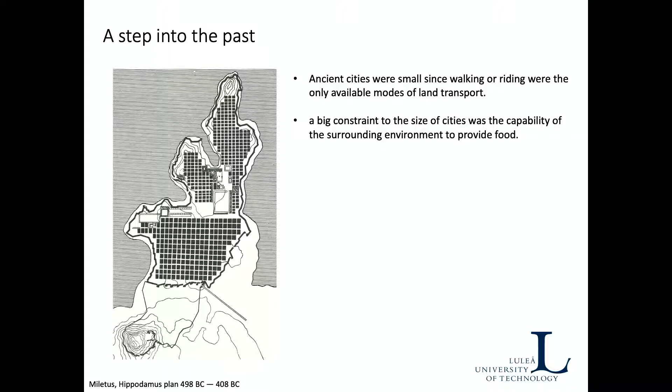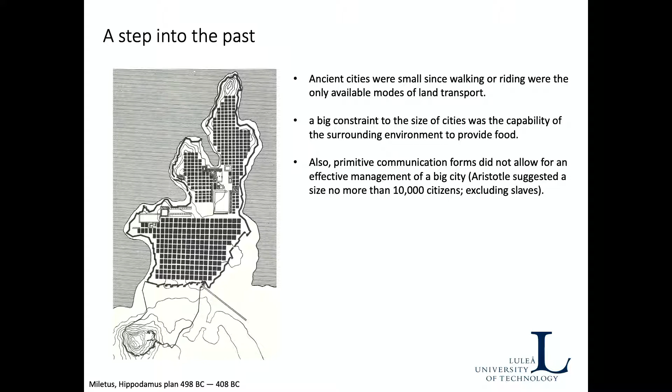But there are also stark differences between cities of the past and today's cities. One such difference is size. Ancient cities were small, since walking or riding were the only forms of transportation available. Also, a big constraint on city size was the capability of the surrounding environment to provide food, and primitive communication did not allow for managing big cities. For example, Aristotle suggested a size of no more than 10,000 citizens was best for managing a city democratically.

Of course, the 10,000 didn't include slaves. Athens at its apex had about 140,000 inhabitants, this time including slaves. A few centuries later, Rome reached 1 million inhabitants during imperial times. At the beginning of the 1900s, there were 11 cities with more than 1 million inhabitants.

According to a United Nations report, in 2018, 23% of the world population was living in cities larger than 1 million inhabitants, while 32% lived in cities smaller than this threshold, and 45% in rural areas. By 2030, the proportion of urban population is set to increase: 26% in larger cities of more than 1 million inhabitants, and 33% in cities smaller than 1 million.

But as we urbanize, the consumption of energy will also increase over time. This is because when people move to urban areas, there is more industrialization, more commuting and transportation, and more consumption. So the urban lifestyle is also an energy-intensive, resource-intensive lifestyle.

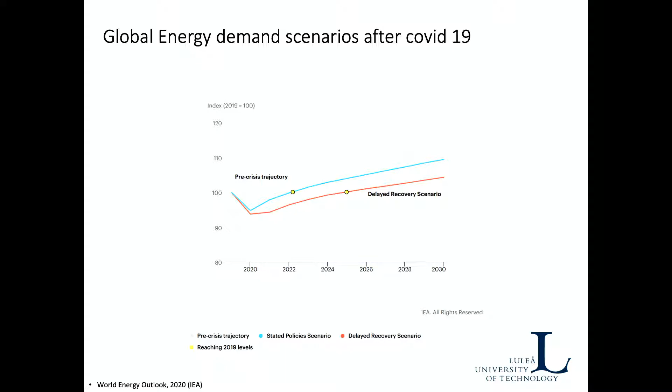You can see in this diagram that even with COVID-19, we've had a setback in the demand for energy. But in the future, we're going to need more and more energy to support our urban lifestyle.

If we look at the forms of primary energy, in the future the lion's share will come more and more from solar photovoltaics and renewables, along with some bridge fuels such as gas.

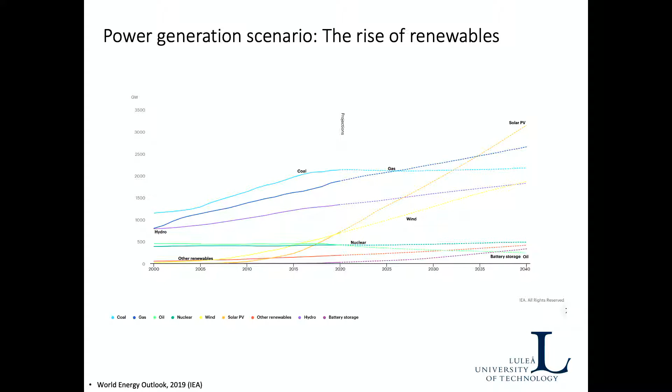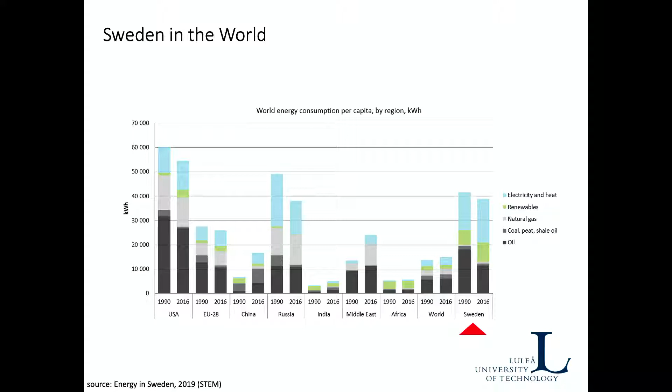If we look at the position of Sweden in the world in terms of energy consumption per capita, we see that Sweden is one of the countries with the largest energy consumption per capita. This is, in many ways, normal—we live in a cold country, so we need to heat our houses, homes, workplaces, and commercial areas. Sweden is also sparsely populated, meaning a lot of energy goes into commuting. But at the same time, Sweden is a very urbanized, advanced, industrialized economy, so energy also goes into manufacturing and consumption.

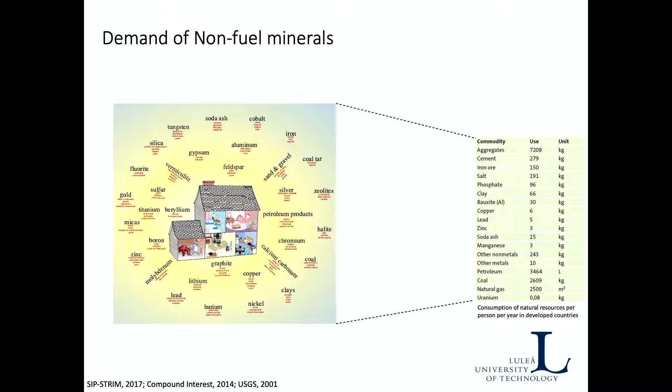We don't need only energy to support our cities, we need also non-fuel minerals. We need materials to build schools, libraries, homes, highways, and also our IT infrastructure, our internet. It has been estimated that around 18 tons of minerals per capita is consumed every year in a developed country around the world.

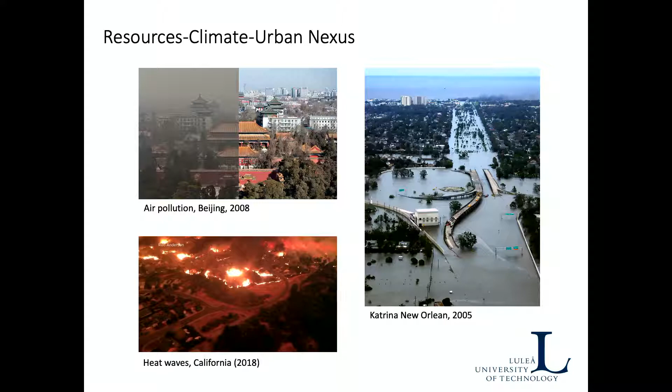From a research perspective, there is a link, or a nexus, between the way we design and build cities, the way we use resources to build these cities and support urban living, and the way consumption of resources affects climate. In turn, climate change affects cities in terms of extreme events. Here are 3 screenshots of possible events that have already happened, for example flooding, air pollution, or heat waves. So I think it is important to keep in mind this triple nexus.

Why would an architect or a planner be talking about that? Again, I think it's good to look at the definition of the subject of architecture and planning. Architecture comes from the Greek word architecton, which means chief builder. This is one of the oldest disciplines on the planet. According to Vitruvius, a Roman planner in 15 BC, architecture can be defined in terms of structural stability, appropriate functions, and aesthetic quality.

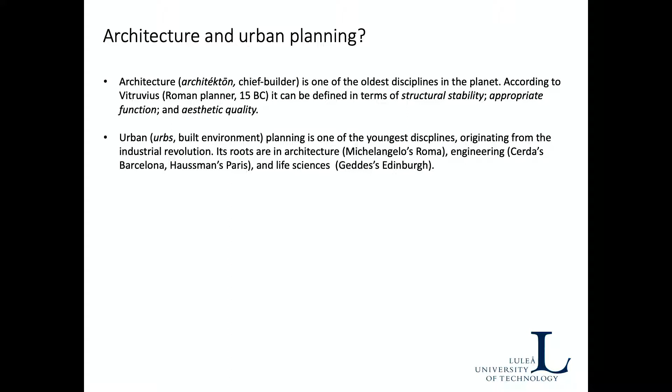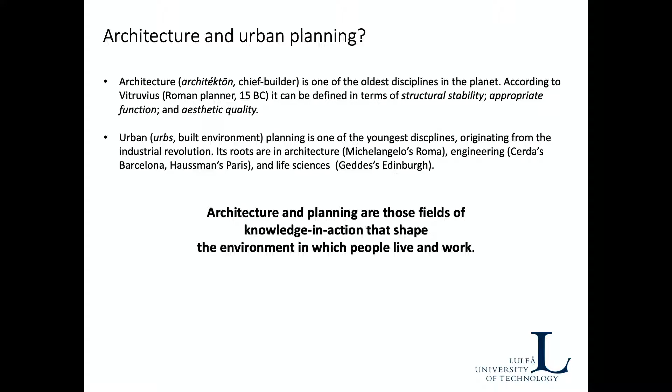On the other hand, urban planning is one of the youngest disciplines in the world, originating from the Industrial Revolution. Urban planning has its roots in architecture, engineering, and the life sciences. So we can define architecture and planning as those fields of knowledge in action that shape the environment in which people live and work. And when I use the term knowledge in action...

It means that typically in other fields, in science and engineering, you have labs to test solutions. But in architecture and planning, our lab is the city. So as we develop knowledge and implement this knowledge in our built environment, at the same time we draw data from it in order to reanalyze the knowledge produced and how it has been implemented, and develop new solutions. So this is the meaning of knowledge in action.

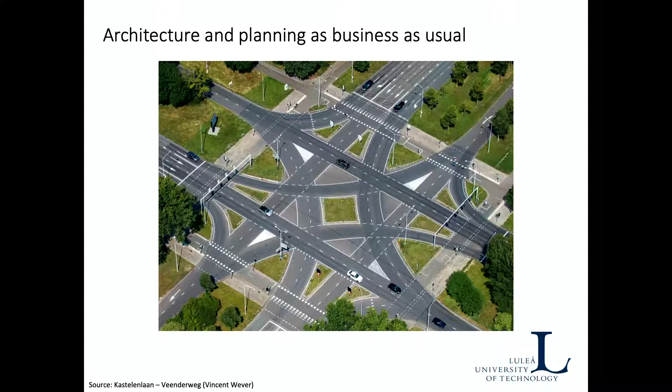But the question is, what has been the result of this process in the last decades? Actually, in the last decades, this process has in many ways failed. When we have planned cities only from the perspective of private car mobility, we have achieved results like the one you have here in the picture, which doesn't look like a very livable place. Also, with the emphasis on suburban shopping malls, there has been more emphasis on commuting, which has of course produced more energy consumption, more space required for parking lots, and also less attractive places.

But also, when everyone wants to have her or his own villa and all of this, when this decision is scaled up for many thousands, hundreds of thousands, or millions of inhabitants, this has a very huge impact on the environment.

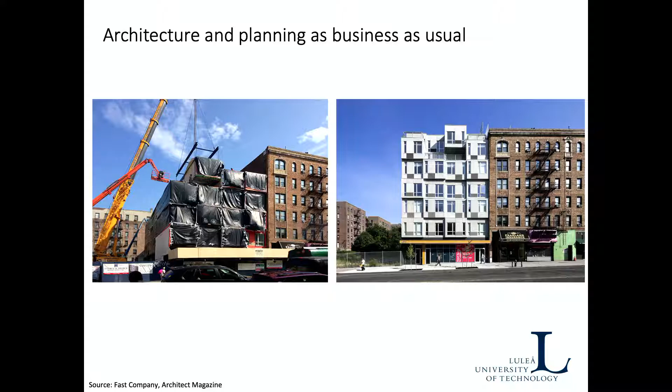Also, there have been big advances in the building construction sector. We are using more and more prefab, and this has been a very good solution to decrease construction costs and provide affordable living. But at the same time, this has raised questions about the quality of these prefab buildings, especially when they are to be fitted into an existing environment that has historical qualities.

And speaking about heritage and historic building districts, in many ways in the last decades, the solution has been that when these buildings were in the way of master plans or new developments, they had to go away. And when you demolish a historic building, many times these historic buildings have very high quality, not only in terms of architecture and construction details, but also sometimes in terms of energy, particularly if we consider the entire life perspective of these buildings.

And once you demolish an old building, it's not going to come back anymore. So we have lost the opportunity to learn from old buildings, particularly if we want to project it into the future cities.

For architects and planners in research, the question is, how do we move from today's cities that are characterized by a missing energy and climate perspective, a weak community consideration, accessibility based mostly on private cars, and missing opportunities from cultural heritage, to future cities?

We need to acknowledge that at the international scale, a lot of work has been done on the theme of sustainability. The United Nations have put forward the Agenda 2030, the Sustainable Development Goals - 17 sustainable goals - and they can be used as a compass in a way to design future cities.

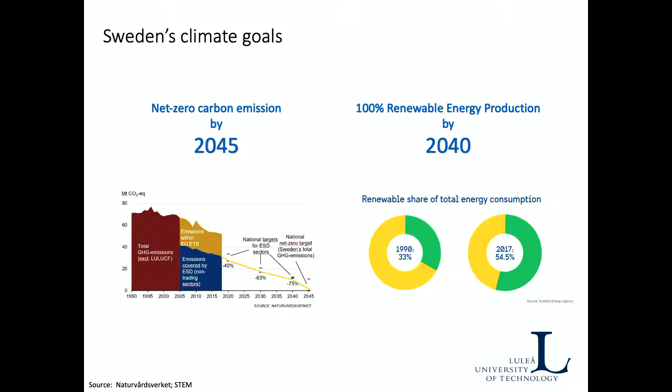We are doing well in many ways, but there is still a lot of work to do in this transformation, and architecture and planning must also contribute to it.

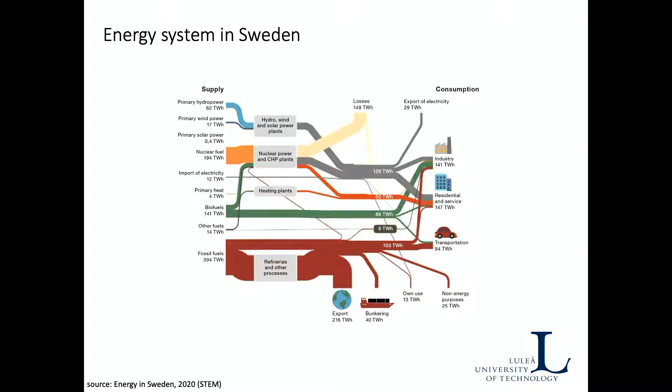When you look at the right side of this picture into consumption, you can see that most of the energy consumption occurs in cities, in industries located nearby urban environments. It's consumed in residential and service areas, shopping malls and offices, and transportation. So let's have a look more in detail into these three functions we find in the city.

Speaking about future industries, we can see that recent trends in digital fabrication, artificial intelligence, and most recently hydrogen, will probably bring industry even closer to the city, back to Europe and to the West in many ways, because production will be decentralized, just in time, closer to potential users, and clean, thanks to hydrogen.

When we look at future housing, the recent COVID-19 pandemic has shown us that distance working is possible, even at massive scale, and this will affect the way we live and work. But the cities are here to stay.

What will change is the percentage and the size - the space of office, living, and commercial space, and how it is located into the city - probably bringing a better focus on living and architectural quality into the suburban peripheries and smaller cities.

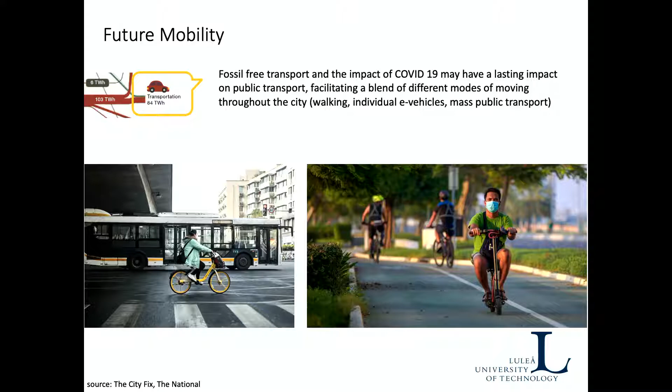Looking into future mobility, fossil-free transport and the impact of COVID-19 will have a lasting impact on public transport. Looking at this more positively, this will probably facilitate a variety of different modes of moving throughout the city - walking, of course important, but also individual e-scooters, e-vehicles, and mass public transport. So it will be a combination of these.

So what kind of challenges does this trend pose for planning and designing new buildings and new cities? I bring in this lecture only two challenges, but there are actually more.

The first is planning for prosumers. The idea with prosumers is that future residents will not only be consumers of energy and food, but they also will be producers of food and energy.

For example, if you look at recent trends in photovoltaics, individual photovoltaic establishments in detached houses or in multi-story apartments, or also in urban farming.

According to research we are developing at LTU together with Professor Christina Eck, we are studying an area here in the city of Luleå, and we put in place a large survey. I'll share a small section where we ask residents whether they were interested in affecting the design of this future small renewable energy equipment in the city, and whether they want to affect the location of new photovoltaic installations in their district, or buy electricity from it or buy shares in it.

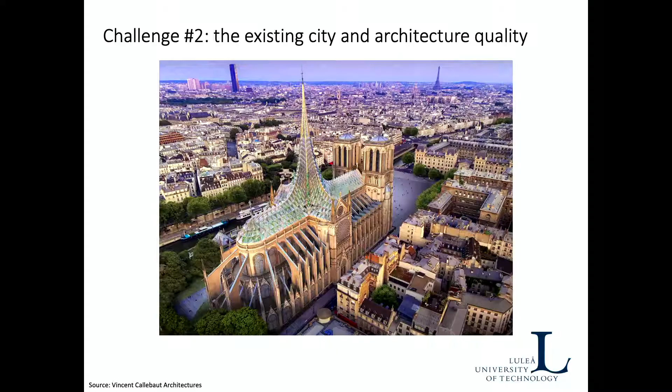They imagined the roof could become a large greenhouse to produce food, and photovoltaic panels would be installed on the roof to generate energy, reused also for the production of that food. Of course this submission was very radical and controversial for a national monument, and it's not going to happen, but it raised important questions, particularly for cities in Europe, and I'd say all around the world.

Typically, we don't build on a tabula rasa. We have our buildings, we transform our cities, but there is something existing. The question is how can we engage with existing buildings in this energy transformation?

I'll also share results from another research project I developed with colleagues Thomas Örn, Sofia Lidelöw, and Andrea Luciani a couple of years ago, in which we studied the way heritage buildings were analyzed in architectural literature.

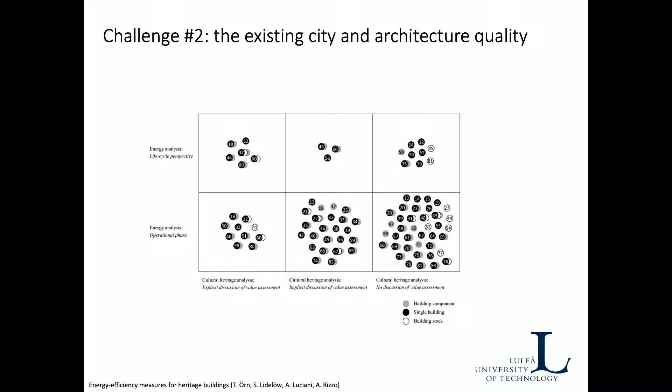Typically, the focus of looking at heritage buildings is always a short-term perspective. We look at the energy problems and microclimate comfort issues they have at the moment, but we should consider more the life cycle perspective of these buildings, because if we look at the entire life cycle, we find that many times they are much more sustainable than the new buildings we are building now.

So we need to change our lens to look also at the existing urban environment, and change our attitude to view this existing city in less problematic ways.

In my research I focus on a concept I call resourcefulness. If you look in the dictionary, resourcefulness speaks to the ability to deal skillfully and promptly with new situations and difficulties. What do I mean by resourcefulness and resourceful cities?

First, why do we need a new term? The concepts of sustainability and resilience have been very good so far, but they also show some problems. In many ways, sustainability and resilience are conservative concepts, because they imply that without broad changes in society we can achieve a sort of hypothetical equilibrium purely by adapting with technologies.

The idea of resourcefulness instead implies that communities have the capacity to engage in deliberative democratic dialogues and develop alternative agendas. So it's more a bottom-up approach—not individualistic, but one that empowers communities.

In our research, the way we frame it here at LTU in the architecture group is to try to develop an architecture for resourceful cities, where design enables a symbiosis between resources and city systems for the generation, distribution, use and storage of energy, food, and other resources—shifting from large-scale centralized to small-scale decentralized resource systems, as with the prosumers I mentioned before. We also rethink the idea of aesthetics in terms of a resource or energy aesthetics, co-created with the community through an open design thinking process.

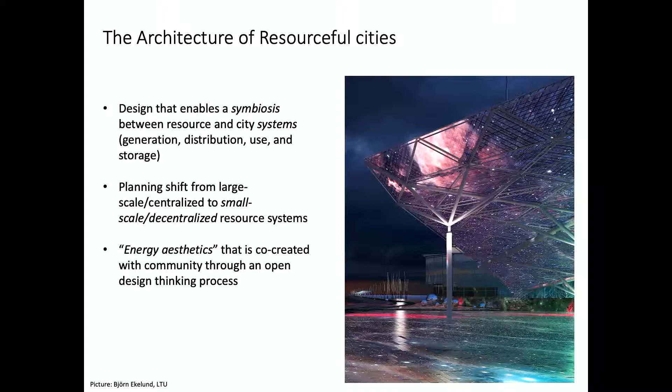All this discussion may look like an academic exercise, but it is not. If we look at recent Swedish government policies put in place over the last couple of years, we can see that the government sees design as a huge opportunity to transform our living environment, to make it more accessible, inclusive, and sustainable. Design here is not only decoration or aesthetics, but also a fundamental thinking process to rethink the way we live more sustainably. So, design as a process.

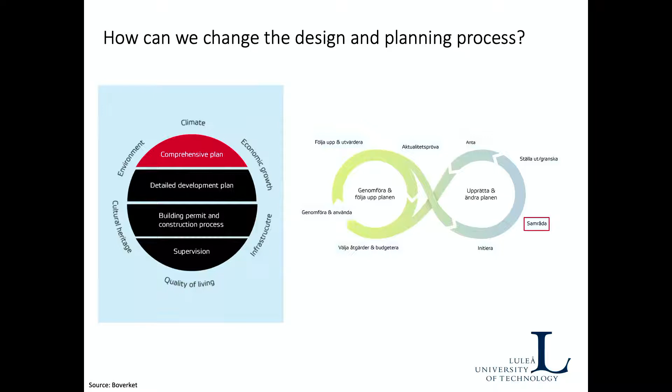So if we go back to where we started, the architecture and planning process, the question is: how can we change this process in the face of the issues I was talking about before? From now on, in the remainder of this presentation, I'm going to show some of the work we are doing in Luleå and our research.

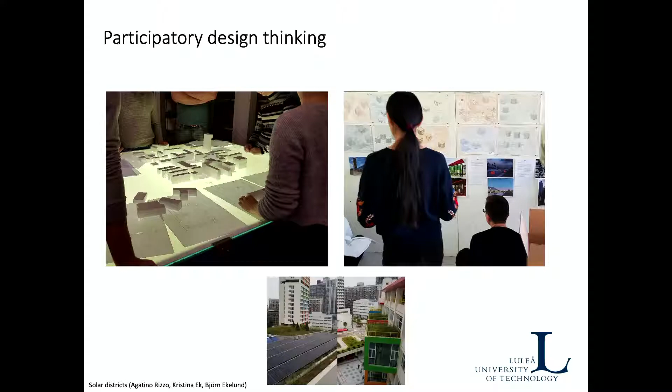For example, in the Solar District project, which I'm working on together with a few colleagues, Björn Ekelund and Kristina Ek, we are using participatory design thinking to bring a community living in a specific area of Luleå to reimagine the public space and their buildings from the perspective of energy. We are extending this work into our teaching as well, to help shape future architects at the same time, transferring research into education.

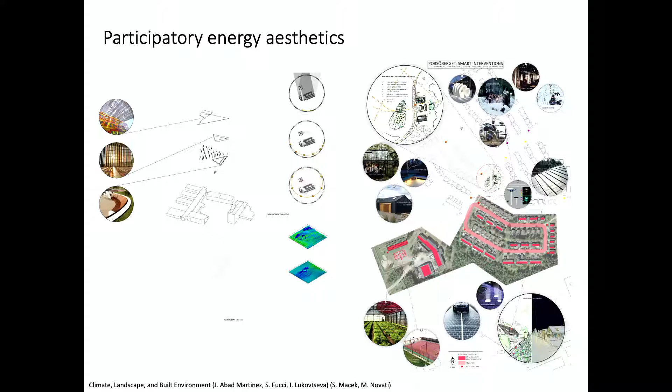What we are trying to develop are new ways to think of design in terms of urban farming and energy issues, and how these issues are embedded in design from the start rather than coming afterwards, where typically we have lots of problems trying to integrate them into later discussions.

We don't only work with architecture and design methods, but also with other methods. For example, in this large European project, UNaLab, which at LTU is led by Professor Anna Stålbröst, and I'm working together with Abdolrasoul Habibipour, we work with living labs — labs that integrate citizens, researchers, and companies to develop new solutions for urban issues. In this project, for example, we developed a card system which helps municipalities set up living labs.

We also work with maps, sometimes with Legos and so on, as a way to stimulate creative thinking among people who perhaps don't have the expertise of architects and planners.

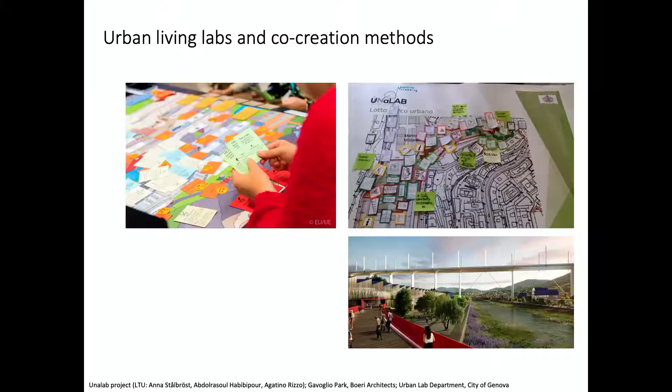For example, in the bottom picture you can see the case of Genoa. As you know, a couple of years ago the bridge in Genova collapsed and many people died. Now the bridge is being rebuilt, but at the same time the municipality of Genoa, which was a partner of our project, was interested in redesigning the areas around the bridge. So they used the project, the Urban Living Lab, to develop the guidelines for an architecture competition, including citizens, companies, and other stakeholders and decision makers, to make guidelines that address the issues required in this very tragic area. What you see here is the successful submission of that architecture competition.

Finally, another tool and method we work with is big data and simulation. Never before have we had so much information and data available. Of course, we have private data, and that's good — it remains private, for our privacy.

At the same time, there is lots of other data that can be used in the architecture and design process to design better cities. For example, in a small project we had a couple of years ago with colleagues at LTU — Tim Johansson, Markus Sandberg, and Johan Wengren — we worked with the city of Kiruna to facilitate urban farming. Kiruna is located in the northern part of Sweden, a cold country, and Kiruna is much colder than the rest. The question is how we can actually produce food there 365 days a year when we have such a long winter period.

So the idea was to set up a digital platform using data related to the energy performance of buildings, sun radiation, and also spatial data related to where we could locate greenhouses. We wanted to work with this kind of data as well.

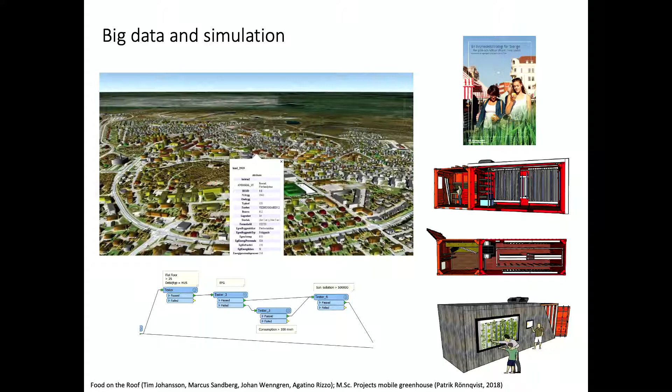Whether they could be located on a parking lot, on their roof, or closer to their facade, we developed a proposal for this greenhouse. It was developed in a master's thesis by Patrik Rönnqvist a couple of years ago, in collaboration with this project. I think this was also a quite interesting application of new planning and architecture systems.

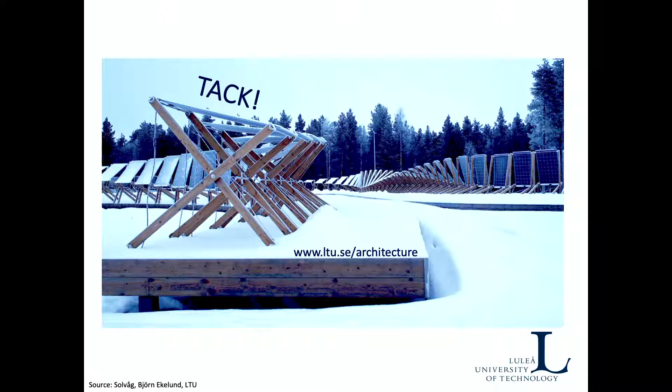So there is not much more to say. I wanted just to end with this picture. This is actually an implemented project by a colleague of mine, Björn Ekelund. He developed this concept together with the workers and students of our second campus of LTU in Piteå. Again, the idea there was to redesign public space from the perspective of prosumers. You can actually visit this any day in Piteå. It's called the Sun Wave. Thank you so much.